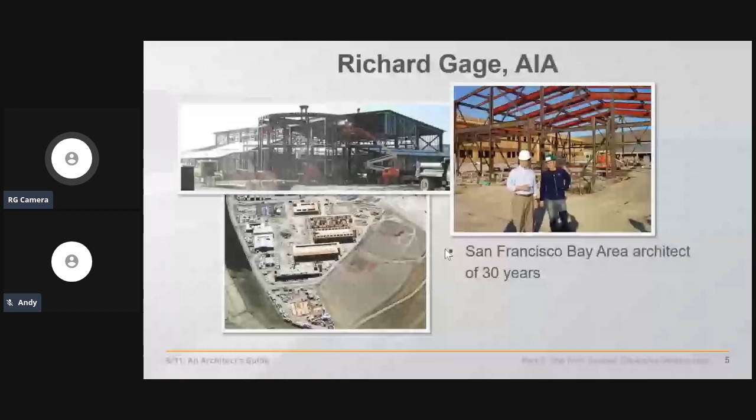Thank you so much, Andy. I want to make sure people understand something about my background. I was responsible at a local firm in the San Francisco Bay Area for the construction documents for these $3 and $10 million gymnasiums and the construction administration for this $125 million high school. More recently, before launching full-time into this important outreach effort, I had similar responsibilities working on this $400 million mixed-use project near Las Vegas with 6 blocks of retail, mid-rise office space, and a parking structure.

Altogether, about 1,200 tons of fireproof steel framing. I now work full-time educating architects, engineers, and others to understand what really happened at the World Trade Center using the material in these courses.

In this case, we do background research, make observations, construct a hypothesis. That's our best guess as to how these towers collapsed. Maybe the jet planes brought them down. Maybe the fires did. Maybe explosions did, and perhaps even controlled demolition.

We'll examine these hypotheses, make predictions on them, test those predictions with experiments, analyze the results, draw conclusions. If the hypothesis is corroborated, we report the results in an open, transparent manner so all can build on the body of our work. We don't hide the input data, for instance, in the computer models used to prove our hypothesis, as NIST has done.

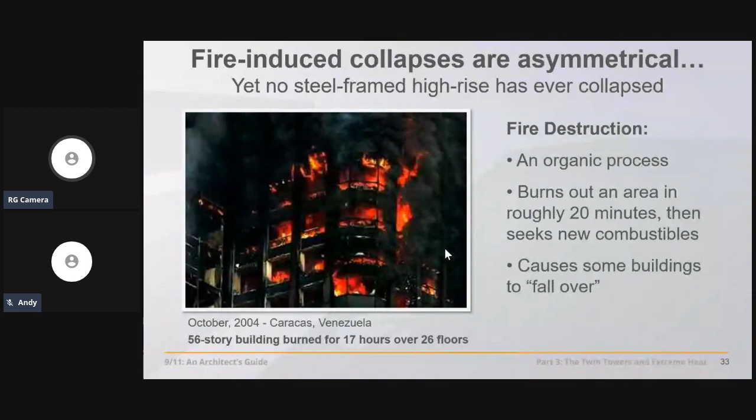There's been some great tests done. In this case, they built an 8-story steel framed building, some of which was fireproofed, some of which was not. This was the largest test of its kind, done in 1995 in the UK, loading it up with all kinds of fuel as you can see inside of this building. They really wanted to test the steel and see what would happen in the most severe case, creating 2,000-degree fires.

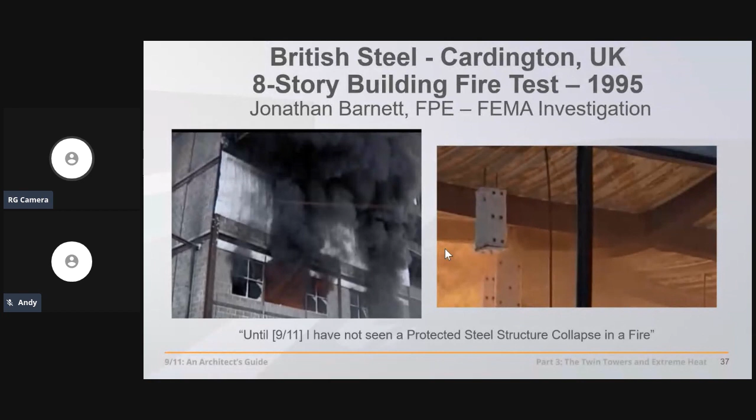And indeed, all that happens is the beams begin to sag. There's no failure of this building, even with beams that are not fireproofed. All of our skyscrapers are fireproofed in the United States.

The test results show it's inherently stable due to the highly redundant nature of the structural steel form. So we have an incredibly important precedent for steel buildings not failing. This test is more applicable to Building 7, which we covered in the first or second week of August, I believe, and which is available online.

You can look that up on YouTube, search for '9/11: An Architect's Guide to Building 7.' That's a precedent that applies particularly to Building 7.

Why? Because Building 7 had these kinds of beams, although they were fireproofed. The Twin Towers are different. We'll look at the structure of the Twin Towers in a moment.

But other buildings have collapsed due to natural causes, in this case earthquakes. The buildings fall over to the path of least resistance. The building is certainly damaged, but it's recognizable as a building. It doesn't collapse into its individual structural column and beam components, for instance.

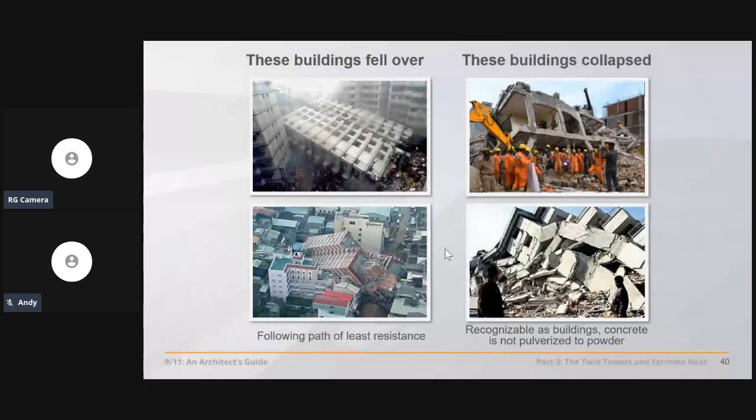This is a very characteristic set of features formed only with great heat. We have chemical reactions that cause those, and witnesses see the results of those. They hear sounds of explosions and they see flashes of light. If you have these features, you know you have explosions.

So keep this in mind. This is an important set of research that we can learn to expect what we would see in a gravitational collapse versus a collapse by explosions or a collapse by fire.

That reminds me, I will give you guys a slide that shows what we might see in terms of a collapse by fire in a wood frame building, which has happened. And that's real important, so I'll add that for you.

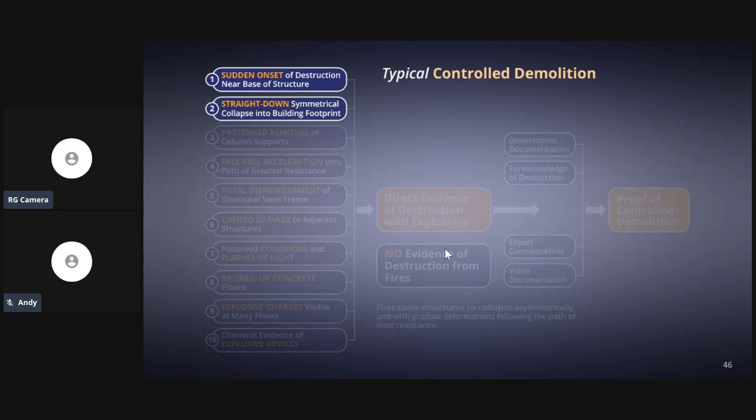There's only a handful of companies in the United States that can handle this type of work. It's extremely difficult, but it's a scientific process and results in a set of features that are commonly recognizable, such as a sudden onset of destruction near the base of the structure, usually but not always; a straight down, nearly symmetrical collapse, depending on how they want to do it, sometimes into the building's footprint.

How do you do that? By removing the columns at once in the desired order, resulting in feature number 4: a free fall acceleration straight down through the path of what was the greatest resistance, the thousands of tons of structural steel in the case of steel buildings that are keeping that building up, that are 3 to 5 times stronger than they need to be to keep that building up.

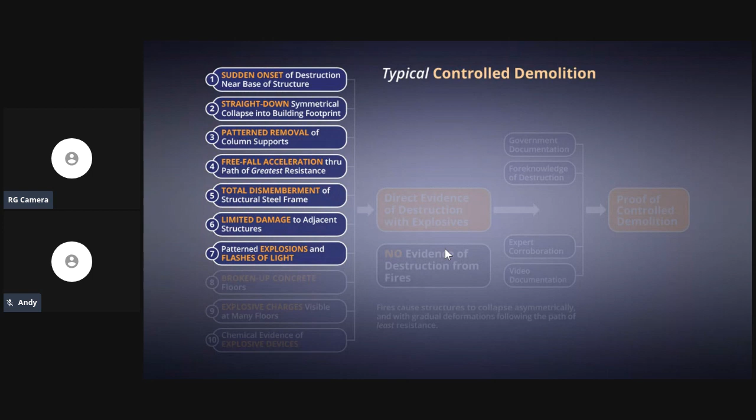That has to disappear somehow, and it results in the total dismemberment of that structural steel frame. Feature number 6: limited damage to adjacent structures, one of the goals certainly of controlled demolitions. Feature 7: patterned explosions and flashes of light heard and seen by witnesses.

Broken up concrete floors—you don't want to leave those floors there and have to jackhammer them up later at all odd and unsafe angles for the workmen to work at. Feature number 9: explosive charges visible at many of the floors. These are isolated explosive ejections called squibs in the demolition industry.

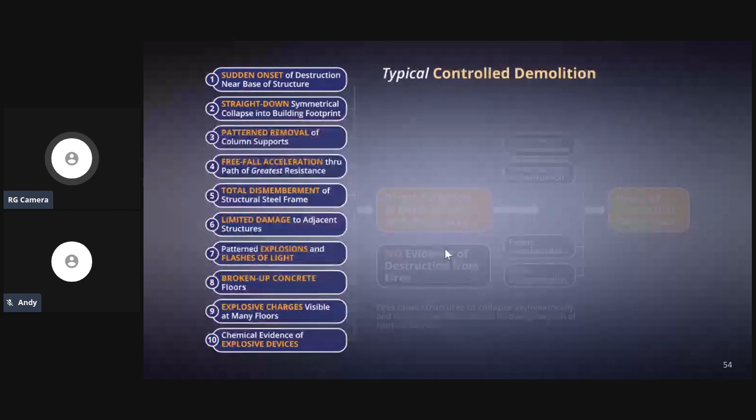Sometimes they're mistimed, sometimes they go off early on purpose, but they're easily recognizable as an explosive. And there's chemical evidence of these explosive devices left behind in the residue. All this is direct evidence of destruction with explosives.

Fire doesn't create these features. Fires cause structures to collapse asymmetrically with gradual deformations following the path of least resistance. So for instance, these fires in the First Interstate building burned 3.5 hours over 5 floors—no collapse.

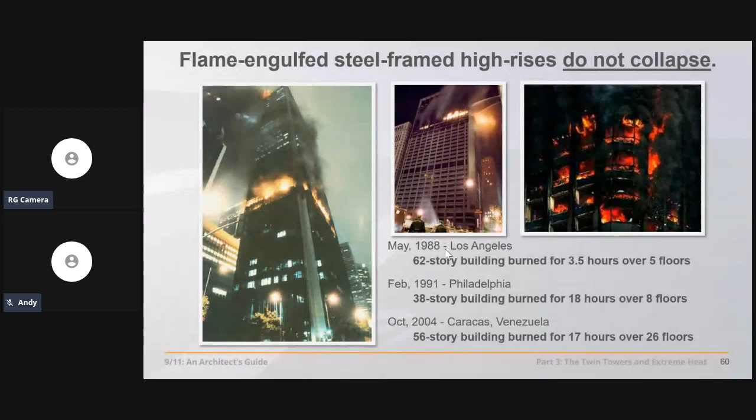Philadelphia: 18 hours over 8 floors, no collapse, because this is a steel framed, fireproofed set of buildings. Venezuela: 17 hours over 26 floors, no collapse. None before 9/11.

Why? Well, the steel conducts that heat away very effectively from its original heat source, and distributes it throughout thousands of tons of heat sink. The steel never gets to its 1200-degree temperature at which steel can soften and begin to sag. It's a critical temperature, 1200 degrees. We have to keep the steel from getting to that temperature in any kind of fire.

So we put fireproofing on it: 2-hour fire protection on the beams, 3 hours on the columns. That keeps the steel from ever getting that hot.

In the case of the Twin Towers, the fireproofing on the steel was said to have been scraped off or knocked off by the impacts of the airplanes, and we're going to be looking at that in a moment. We also build these buildings out of non-combustible materials and keep tenants from bringing in loads of fuel that could make fire a real problem.

To keep fire from ever becoming a problem, we put it out before it even gets to be a problem with sprinklers. In the case of the Twin Towers, the sprinklers were said to have been disabled by the impacts of the airplanes and the explosions that occurred along with those.

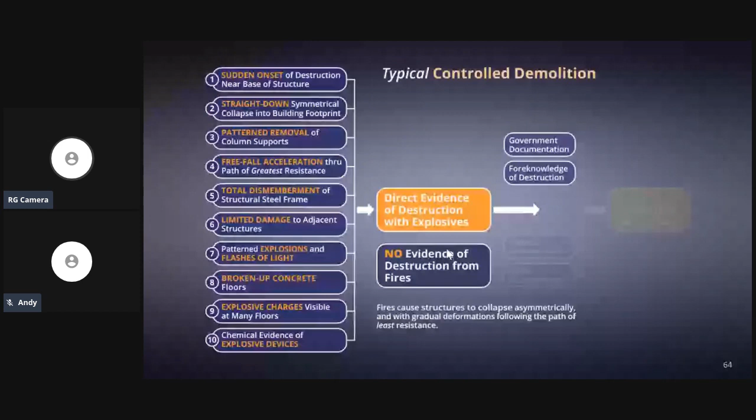We also have additional circumstantial corroborative evidence that we can rely on for additional support for proof of controlled demolition, such as government documentation. You don't just go out and bring a building down - you need approvals, typically. So we have foreknowledge of the destruction. We'll be looking at some of that. We looked at some of that last week in this webinar, in part 2, which is on YouTube - you can look that up, 9/11 An Architect's Guide, part 2.

Experts agree this is a controlled demolition - at least those experts without a financial or political obligation that might sway their objective opinion. So we'll look at the experts today. Video documentation, of course, can be very helpful in determining what happened. We looked at a lot of that last week, and we'll look at more this week. This can all be proof of controlled demolition.

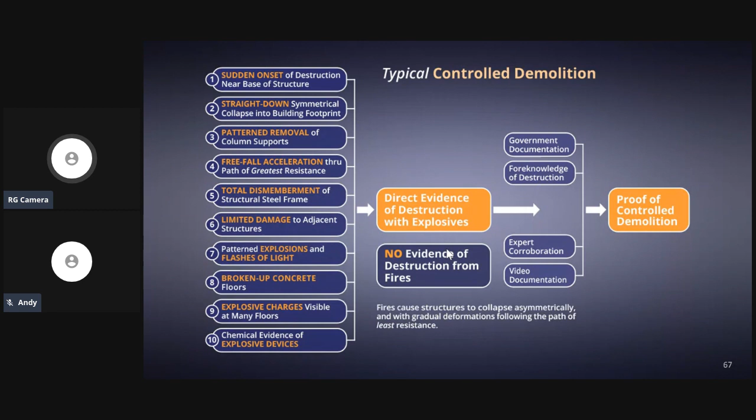With that in mind, let's focus that model on the Twin Towers as we proceed from last week, in which we saw feature number 1, 2, 3, 4, 5, 6, 7, and 8. We saw these features all very clearly defined last week - some very characteristic features of controlled demolition too.

And that was all direct evidence of destruction with explosives, not evidence of fire. Fires cause less robust structures to collapse, again asymmetrically, with gradual deformations along the path of least resistance. Today we'll be focusing on the extreme heat exhibited by the pyroclastic-like clouds that we'll have here.

Let's look at the National Fire Protection Association guide, NFPA 921, Guide for Investigation of Fire and Explosions. It says, look for thermal effects. What does that mean? Large volumes of gas and the large amount of heat released in chemical explosions, causing rapidly expanding plumes of hot gases. Now, we certainly had that when the planes hit the towers, but we're talking about something else here.

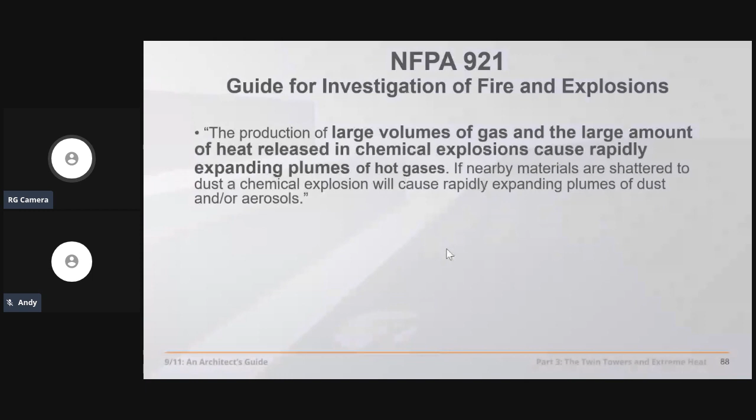This is down in the pile after the buildings have collapsed. This is not about the airplane impacts - this is during the collapse also. We have rapidly expanding cauliflower-shaped plumes in all of the photos and videos, indicating extremely hot gases, which we're going to be looking at the source of today, in a number of different ways, covering lower Manhattan.

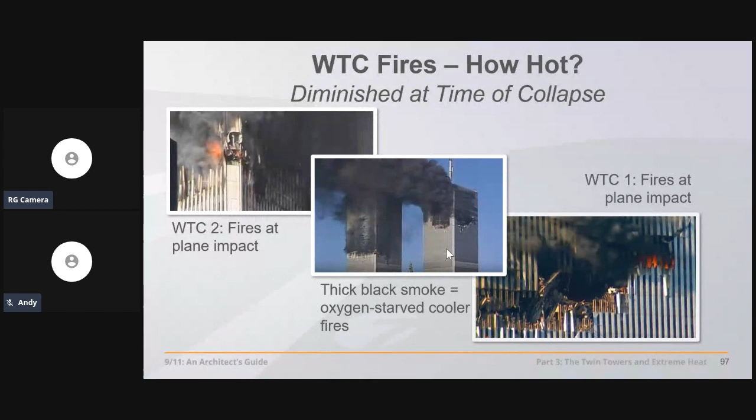I'm making a note here on a correction I have to make. Do we have extremely hot gases at the time of the collapse? No - something else happened after this. At this time, just prior to the collapse, we have diminished fires and temperatures. The thick black smoke indicates oxygen-starved and cooler fires. So where did all that heat come from?

It's got to be coming from something akin to this, and we'll be looking at such evidence as we move into the extreme heat and the evidence of molten steel and iron, particularly well highlighted by Massimo Mazzucco in his 5 DVD set, 9/11 New Pearl Harbor.

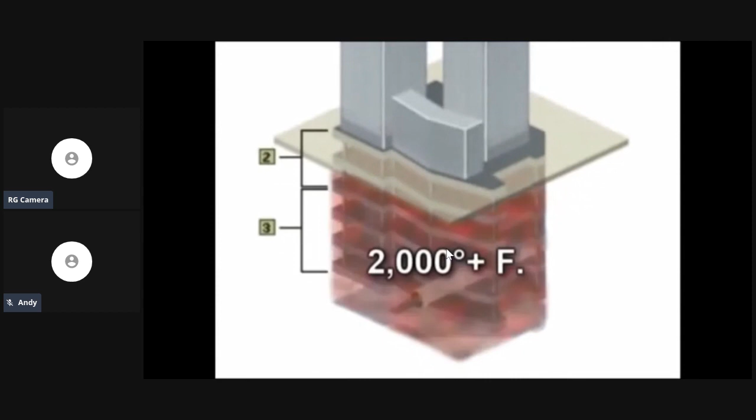Possibly the most important unexplained phenomenon at Ground Zero are the extremely high temperatures registered under the rubble for many weeks after the collapses. On September 16, NASA shot these thermographic images of Ground Zero, indicating unusually high temperatures at the base of the 3 collapsed buildings. Despite the heavy rains of September 14th, the hotspots registered peak temperatures of more than 1,300 degrees under the rubble.

10 days later, the fires kept burning. What's to explain, Governor, the smoke that still comes out? There's still fire down below. There is such an incredibly deep pile of rubble, and the tower goes down 5-6 stories underground. But we had ABC crews come back just in the last few minutes telling us there are still flames coming out of the base of the trade towers. For the rescue workers, this became an additional burden on their already gruesome task. Out still on the rubble, it's still, I believe, 1,100 degrees.

The guy's boots just melt within a few hours.

On October 8th, the hotspots under the 3 collapsed buildings remained clearly visible. 6 weeks later, as the excavations progressed, the situation seemed only to get worse. It's unbelievable, and this is almost 6 weeks later. As we get closer to the center of this, it gets hotter and hotter.

It's probably 1,500 degrees. We've had some small windows into what we thought was a core at some point, and it looked like an oven. It was just roaring inside, and it was just a bright reddish orange color.

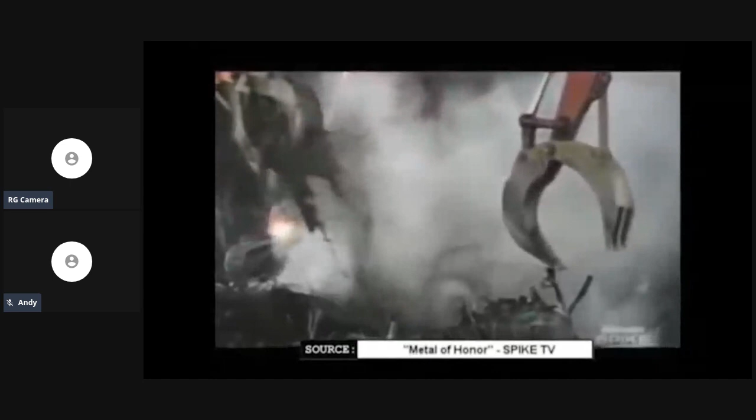The consequences of such extreme temperatures were quite visible on the steel being extracted from the rubble. Where the grapplers were pulling stuff out, big sections of iron were literally on fire on the other end. They would hit the air and burst into flames, which was pretty spooky to see.

We would create an air pocket by moving steel, fueling the fires underground. These underground fires are just like fires of hell. If you could make a video of what you perceive hell to look like, with fire shooting up at times, that's what would happen. You would be in the middle of what would look like steel, and then fire would just pop up. Firemen and ironworkers were coming out with their boots literally melted. Then the hose would come over and they would try to put that part out.

I got there. Charlie Vitchers was a supervisor of removal operations at Ground Zero. From PBS's America Rebuilds page: Vitchers' crew picked up 40 to 60-foot long pieces of steel impaled in the pile, where the bottom 20 feet would be glowing red hot. Vitchers said trucks loaded with steel would pass by, and you could feel the back of your neck burning standing 20 feet away.

In an article called A Dangerous Work Site, the U.S. Department of Labor wrote that underground fires burned at temperatures of 2,000 degrees Fahrenheit. This was confirmed by Mayor Giuliani, who said there were fires of 2,000 degrees Fahrenheit below the ground. The Journal of the American Society of Safety Engineers wrote that thermal measurements taken by helicopter each day showed underground temperatures ranging from 400 to more than 2,800 degrees Fahrenheit.

8 weeks later, and the fires still had not subsided. You see how this debris is still smoking? That's from the fires that are still burning. 8 weeks later, we still got fires burning. So, I mean, these things are burning. At one point, I think they were about 2,800 degrees.

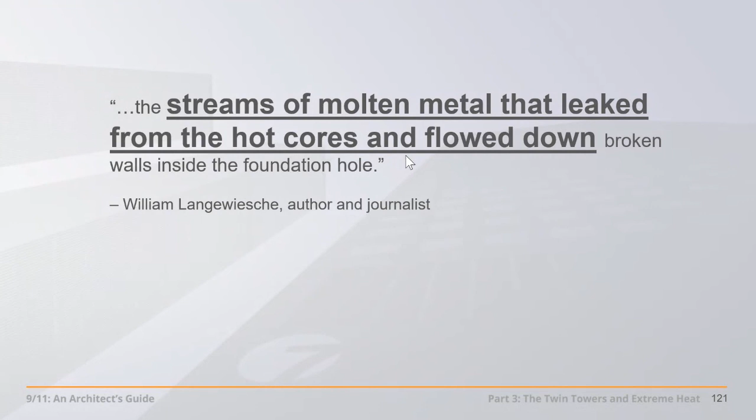Red hot steel being pulled from deep within the pile, dripping from the molten steel, says this firefighter. Saw pools of literally molten steel, says the president of the cleanup company, Tully Construction. Seeing the molten steel, uncovering red hot metal beams, ranging from molten metal which was still red hot weeks after the event. Molten steel at the heart of the tower's remains. Streams of molten metal that leaked from the hot cores and flowed down. Metal dripping from a beam.

Molten steel beams to human remains. The end of the beam dripping molten steel. Mark Loizeaux, president of Controlled Demolition, Inc., confirms molten steel was encountered primarily during excavation of debris. There are both videotape and photos of the molten steel being dipped out by the buckets of the excavators. A river of molten steel, a little river of steel flowing - says who? Leslie Robertson, the actual structural engineer of the company himself. Are these credible witnesses? His associate, Richard Garlock, said the debris past the columns was red hot, molten, running. We see molten material flowing out of the South Tower.

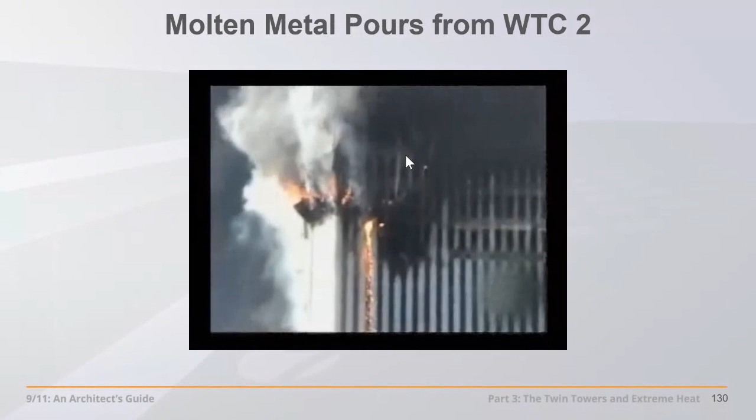In a frequently asked question, answered years later but very frequently asked: this must be molten aluminum from an airplane. Nope. Molten aluminum looks silvery in daylight conditions.

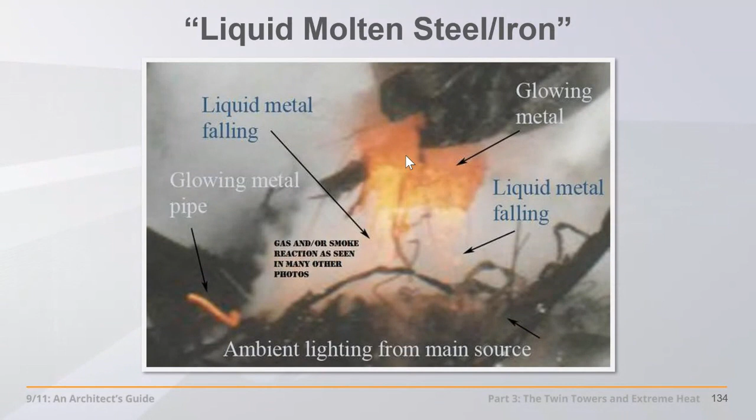Doesn't glow yellow and orange like this. This is iron or steel, can only be liquid metal falling out of the crab claw excavator.

At the New York Police Museum today, you can see molten concrete. Now, concrete doesn't melt until 3,200 degrees, around the guns in the police area in Building 6.

Molten concrete. I didn't even know concrete could melt. Fire temperature so intense that concrete melted like lava around everything in its path, including this handgun. Steel members in the debris pile appeared to have been partly evaporated under extraordinarily high temperatures.

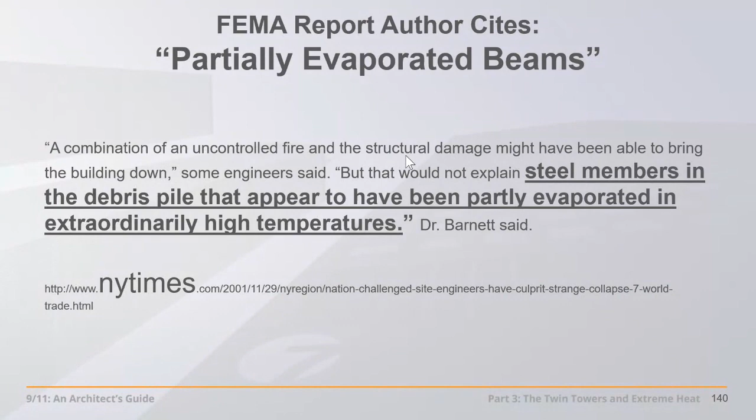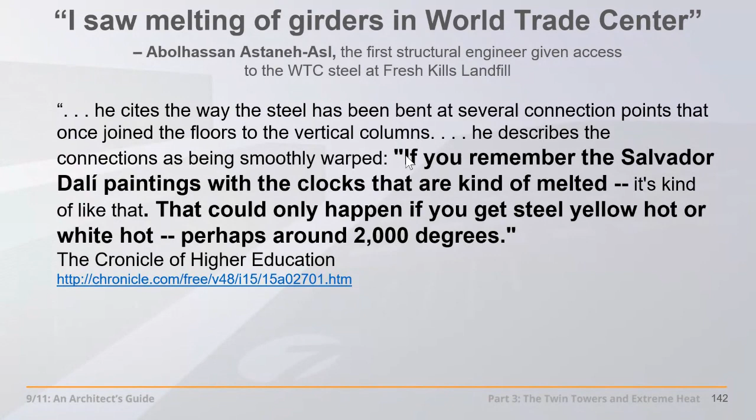I saw melting of girders at the World Trade Center, says one of the lead structural engineers investigating the debris, Abolhassan Astaneh-Asl. He says if you remember the Salvador Dali paintings with clocks that are kind of melted, it's like that. It can only happen if you get steel yellow hot or white hot, perhaps around 2,000 degrees.

But these fires weren't that hot. That's why we're talking about this. Let's go back to Massimo Mazzucco.

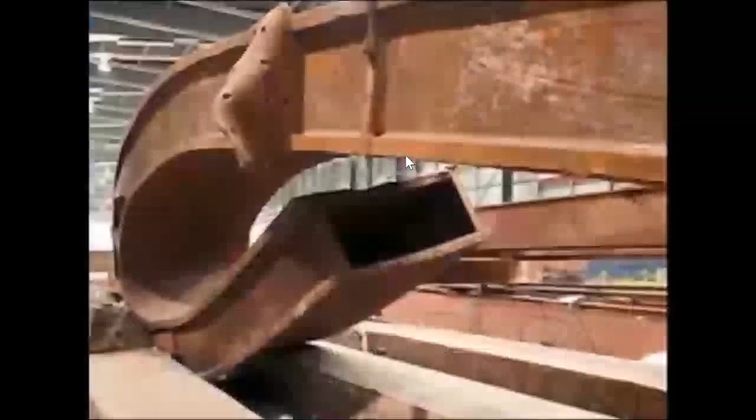Another proof of extremely high temperatures reached during the collapse are the twisted and mangled steel beams found at Ground Zero. Architects, engineers, people who work with steel, welders have just never seen the level of destruction and the level of deformation of this material in our lives.

You saw steel, some of the thickest steel I've ever seen, bent like a pretzel. This 8-ton steel I-beam is 6 inches thick. It was selected to be preserved for future generations for the near-perfect horseshoe-like bend formed during the collapse.

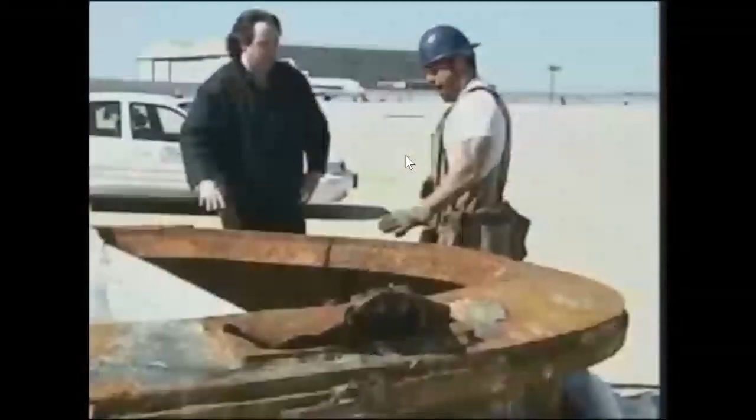I found it hard to believe that it actually bent because of the size of it and how there's no cracks in the iron. It bent without almost a single crack in it. It takes thousands of degrees to bend steel like this.

In fact, the temperature of 2,800 degrees mentioned before is not casual at all, as that's exactly the temperature at which steel melts.

Well, how do we get to temperatures at which steel melts? It's documented by FEMA in their report, which came out in 2002, in their Appendix C, a metallurgical examination of the steel.

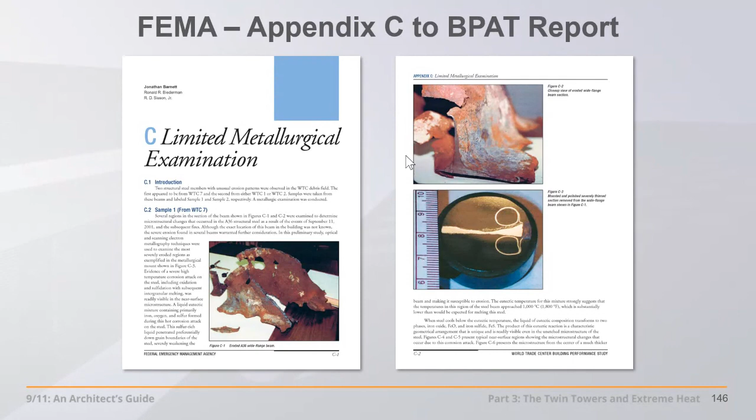Let's look at it. A 1-inch column reduced to half-inch thickness, its edges curled like a paper scroll, thinned to almost razor sharpness. What happened to this steel?

Not fire. Fire can't do this. Rapid oxidation, sulfidation, they describe, intergranular melting, liquid iron. Now that's molten iron. That's 2,800 degrees minimum.

Sulfur formed during this hot corrosion attack on the steel. Where did the sulfur come from? No clear explanation for the source of sulfur has been identified.

Well, this is called the deepest mystery uncovered in the investigation, yet it's completely ignored by NIST, and it's omitted in the final NIST report. The presence of sulfur was very clearly identified in this Appendix C of FEMA.

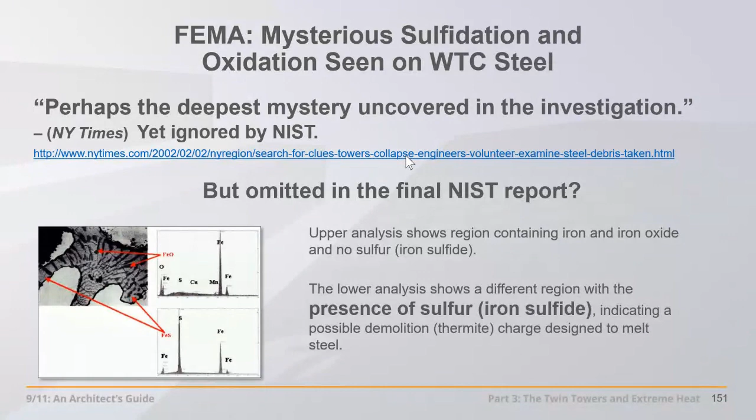NIST took over the investigation, threw out this Appendix C, and years later, acknowledged in their frequently asked questions that sulfur present in the gypsum wallboard was prevalent in interior partitions.

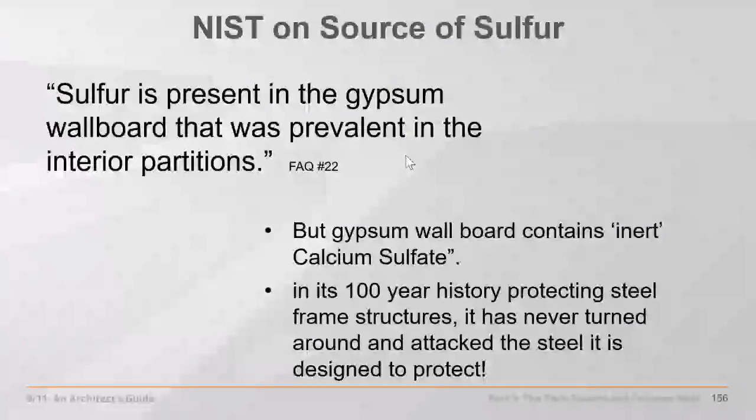Wait, that can't be. Gypsum wallboard contains inert calcium sulfate, and in its 100-year history of protecting steel, it has never turned around and attacked the steel that it's designed to protect. So this is a ludicrous speculation on the part of NIST to try to explain something that the official story cannot possibly explain.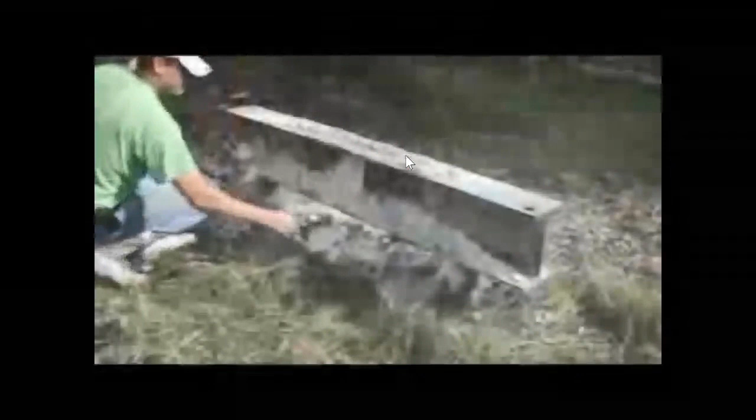Experiments is what you do to see if inert calcium sulfate can turn around and attack the steel. You set a 2,000 degree fire, you put powdered gypsum in there, and you see if it attacks the steel.

But as you can see, no attack on the steel. That's why they use gypsum wallboard to protect it. Where was it coming from? It burned. The smell of sulfur, says this demolition worker.

Well, let's see what NIST has to say about this phenomenon. First of all, let's go back to your basic premise that there was a pool of molten steel. I know of absolutely nobody, and no eyewitness who said so, nobody who's produced it.

But witnesses testify otherwise. Get down below and you'd see molten steel running down the channel rails, like you're in a foundry. Like lava from a volcano.

Actually melted beams where it was molten steel that was being dug out. Underground, it was still so hot that molten metal dripped down the sides of a wall. And the cleanup was very difficult in the beginning.

Steel was coming out red in certain areas from the first couple of weeks. This fused element of steel, molten steel. And they pulled off a big block of concrete, and there was like a little river of steel flowing.

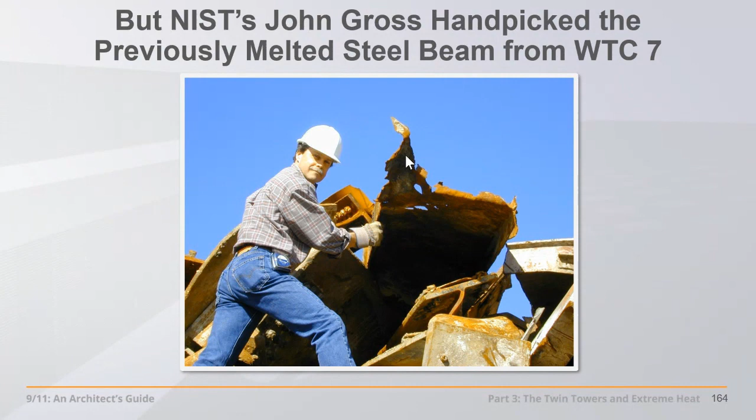Leslie Robertson confirmed a river of steel flowing once again. Here's John Gross, lead project engineer—you just heard from him. He's cutting off the very piece of steel that was sent to FEMA in the beginning to study for their Appendix C. They included this piece in Appendix C, and yet NIST says, gosh, we have no steel could be recovered. What molten iron are you talking about?

It's not jet fuel, because the fires are speculated by some supporters of the official story to be 1,200 degrees. NIST claims 1,800 degrees Fahrenheit. Even so, we're 3 times less than what's needed to melt steel. It's not the jet fuel. Jet fuel, according to its manufacturer, burns only 600 degrees in the open air.

Yet steel had definitely melted. As you can see here, we can tell by the material, molten metals, what the temperature is by the color. We're exceeding 2,500 degrees here in the yellow and white portion down at the bottom. So where is this coming from?

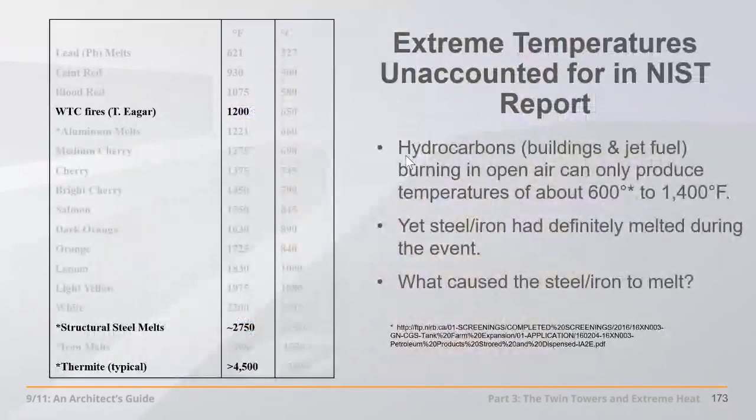This incredible hot temperature—NIST says any molten steel in the wreckage was more likely due to the high temperature resulting from long exposure to combustion within the pile. What? Exposure to combustion? How do you get temperatures exceeding the capability?

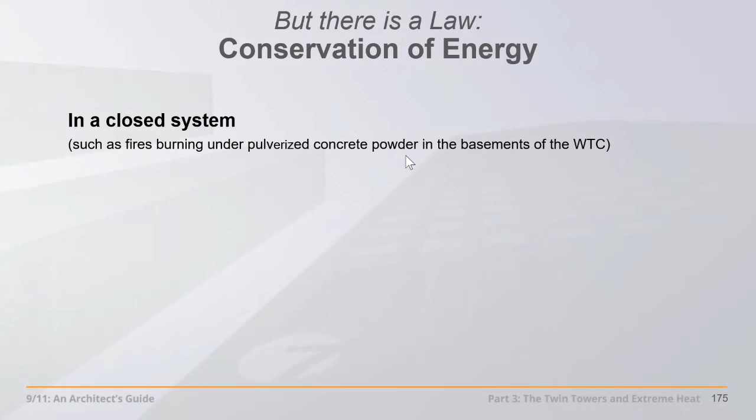This is a closed system. There's a law, it's called the conservation of energy. Like fires burning under pulverized concrete powder in the basements of the World Trade Center, the amount of energy is fixed. You can't create any more energy inside the system. In other words, a fire can't get hotter than the capacity of the fuel that it's burning. You can only convert that energy from one form to another—the heat is dissipated, it doesn't increase. So we look at evidence for the potential cause of all of this heat.

Forensic evidence: thermite is a possibility. Could it have produced all that molten metal in those extreme temperatures? Well, what is thermite anyway? An incendiary used by the military, thermite is a compound of iron oxide and aluminum, which when ignited sustains an extreme heat reaction, creating molten iron. In just 2 seconds, thermite can reach temperatures over 4,500 degrees Fahrenheit, quite enough to liquefy steel.

We know that open-air fires cannot burn hot enough to melt steel, but metal had melted at the base of the towers. Appendix C of the FEMA report describes sulfur residues on the World Trade Center steel. The New York Times called this the deepest mystery of all. Sulfur slightly lowers the melting point of iron, and iron oxide and iron sulfide had formed on the surface of the structural steel. Sulfur used with thermite is called thermate, producing even faster results.

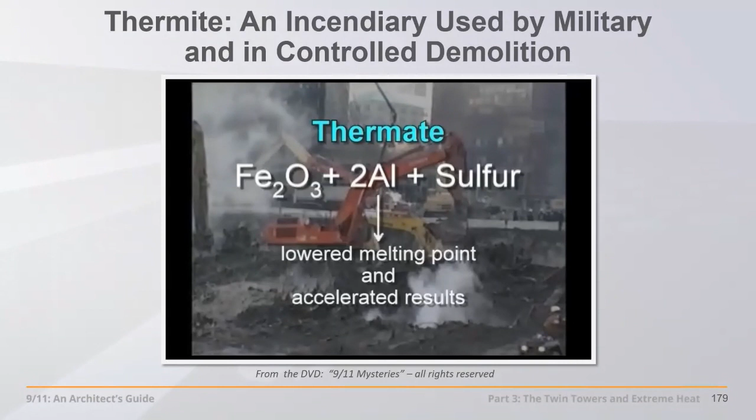Maybe we're getting somewhere here, because if thermite were used, it would explain the molten iron—not molten steel, but iron. By the way, we haven't used elemental iron in about 100 years in our skyscrapers, so this is elemental iron we're talking about. It's not coming from the steel. It would explain the presence of extreme heat, because 4,500 degree temperatures are the byproduct of a thermite reaction. It would also explain the sulfur, because sulfur is added to thermite to become thermate, much more effective at cutting through steel. None of these features can be explained in the official story.

Let's go back to NFPA 921. It says, look for unusual residues that could arise from thermite, magnesium, or other pyrotechnic materials. The National Fire Protection Association is the authority on fire and explosion investigation, used not only in the United States but throughout large parts of the world.

NIST says, well, we found no corroborating evidence to suggest that explosives were used. But when pressed a year later, they finally admit: we didn't test for the presence of explosive residue. You can't find what you won't look for, but others looked for it and found it. It wasn't that hard to find.

Here's Steven Jones, physicist formerly from Brigham Young University. He says thermite reactions would produce a characteristic burn pattern—a white, yellow, hot liquid metal, like we see pouring out of the South Tower minutes prior to its collapse and throughout the piles, as you've seen already.

A whitish cloud of aluminum oxide ash—what? As you see rising from the top of this material pouring out of the Twin Towers minutes prior to its collapse. And as you see trailing these thick white smoke clouds, trailing these freely flying structural steel sections that we looked at last week, flying out horizontally and at 45 degrees. Steel isn't flammable; it's not on fire unless there's something burning in and on the steel, such as a thermitic reaction.

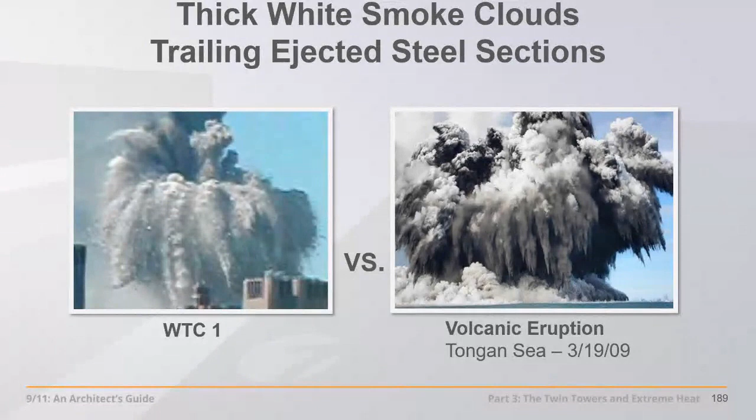What else about thermite? It would leave behind unique chemical evidence, such as iron, aluminum, copper, calcium, silicon - fairly common elements - but also some unusual elements like fluorine and manganese left behind.

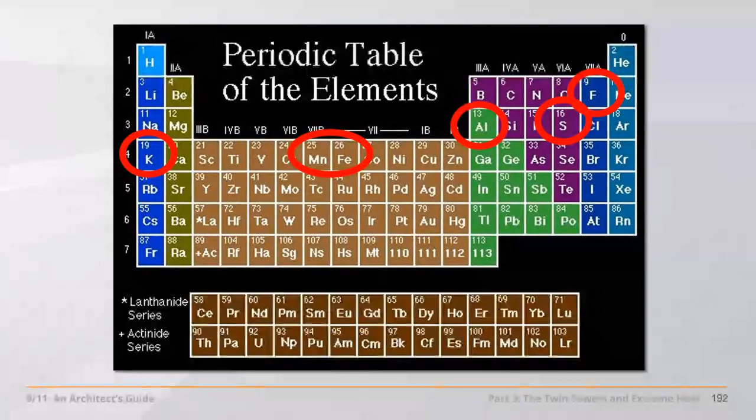These elements on the periodic table were found in this small section of this 40-pound chunk called meteorites, fused molten metal. Some chips were sent to Steven Jones, and he rules out aluminum from the jet planes because it's predominantly iron, previously molten iron.

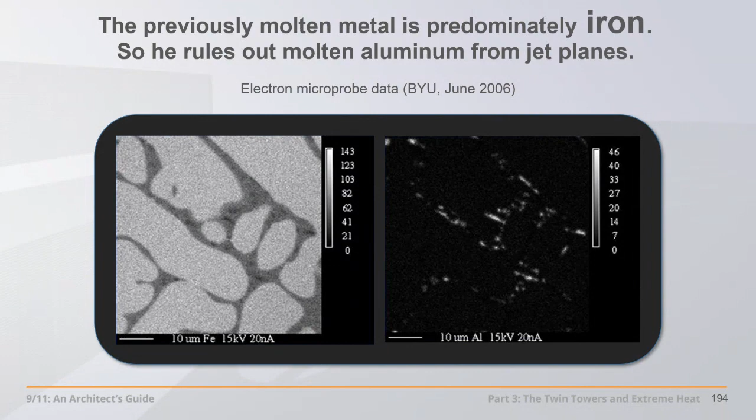He says it has abundant manganese in this electron microprobe data analysis, so he rules out molten structural steel as a major component. It has aluminum, sulfur, potassium. So this is clearly the residue of thermite.

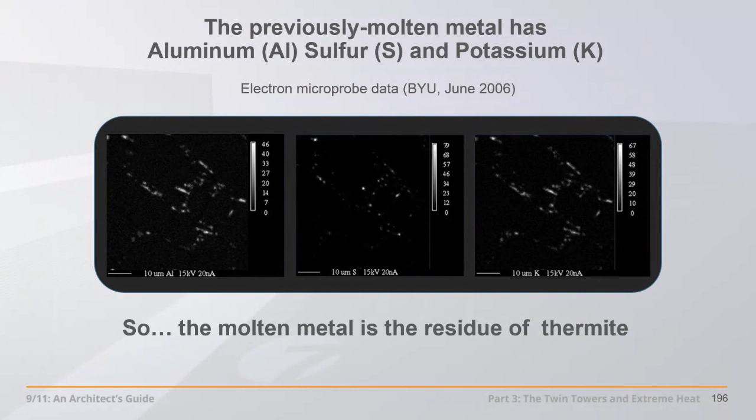What's that doing in the World Trade Center aftermath? Oh, it has manganese and fluorine in abundance. This is from potassium permanganate, commonly used as an oxidizer in thermite. Fluorine is used in sol-gel type thermite charges, very special ones. So this is all part of a thermite fingerprint.

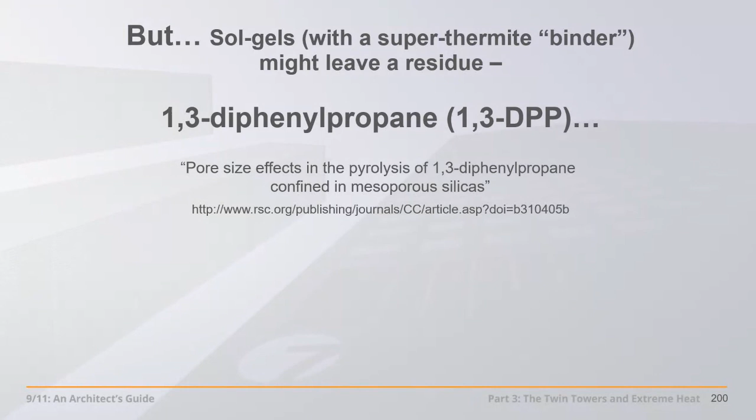Sol-gels would leave behind a very special residue, though: 1,3-diphenylpropane. Interestingly enough, one molecule was present at levels that dwarfed all others, says Erik Swartz - 1,3-diphenylpropane. We've never observed it in any other sampling we've ever done.

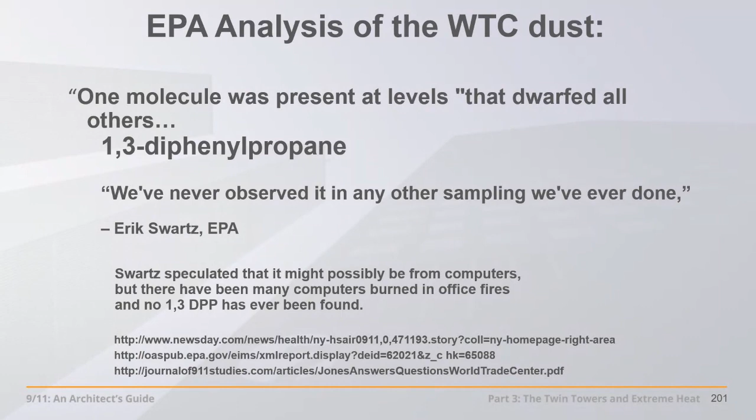It's not from plastics, it's not from computers. Even though they speculate - gosh, what else could it be from? It must be from something like that. But they never found 1,3-diphenylpropane in office fires that have plenty of plastics and computers.

He examines a piece of this steel sent to him by the sculptor at the International Peace Park in Manitoba - World Trade Center 7 steel in this case. X-ray energy dispersive spectroscopy determines what? Iron, sulfur, potassium, manganese. This is another fingerprint of thermite, says Steven Jones, physicist.

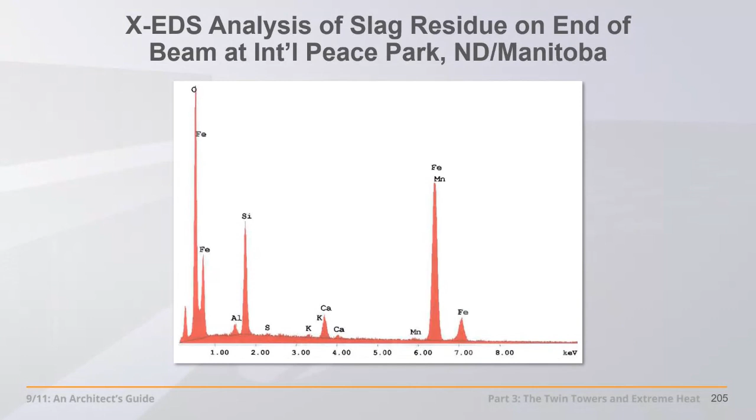Well, you can make thermite in your backyard, and thermate as well. Jonathan Cole, civil engineer, did. You have to use a shaped cutter charge. You can't just pour this against the steel like the ridiculous National Geographic experiment on their program, in which they tried to debunk conspiracy theorists. No, you have to put a shaped cutter charge.

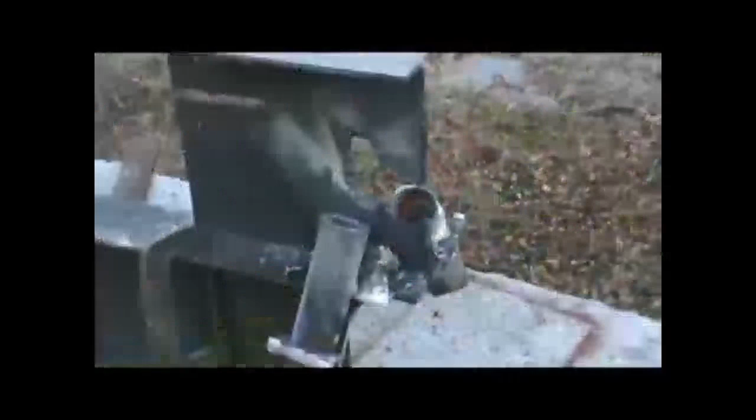You can make it at home - here it goes. The web was reduced in thickness with gaping holes, thinned to almost razor sharpness, with a Swiss cheese appearance. Where did I see that before? Oh, in the FEMA analysis of the steel from the Twin Towers in Appendix C, which NIST threw out when they took over the investigation.

There are very highly efficient thermite-based cutter charges developed prior to 9/11, 2001, in which molten iron streams are issued in hundreds of milliseconds, cutting through much more thickness of steel - much greater thickness than is capable with shaped cutter charges of high energy explosives like C4 and RDX.

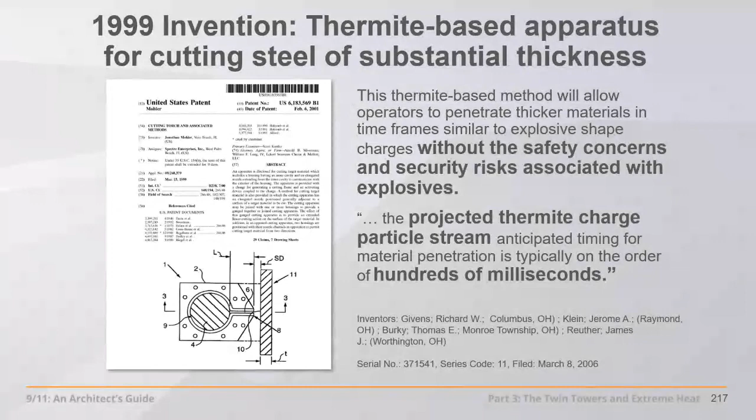Which is why they might not have used them. They also might not have used traditional shaped cutter charges because those provide very loud bangs and very bright flashes. That audio and visual signature might have been a dead giveaway. So something a little more subtle seems to have been the order of the day here.

This device uses consolidated consumable thermite as its casing, so there'd be nothing left in the pile except pools of molten iron, which we have plenty of.

But what else did they find in the fine powder? So ubiquitous across 9/11, from river to river, a 3-inch thick pile which is 30% concrete, as we looked at in last week's webinar. The U.S. Geological Survey does a particle atlas of dozens and dozens of different samples, and they always find the same thing though: previously molten iron microspheres, almost invisible to the naked eye, most of them.

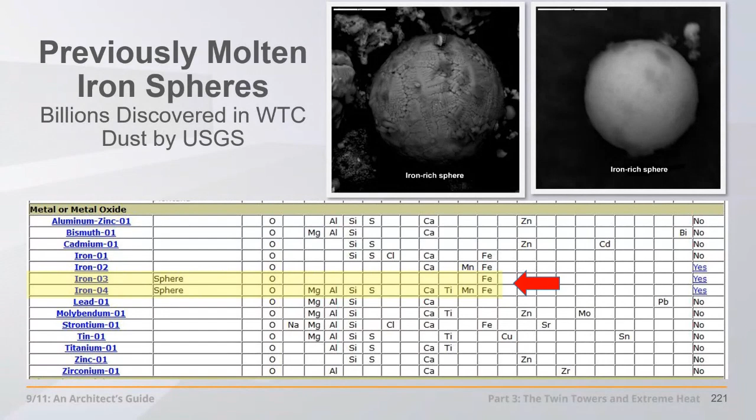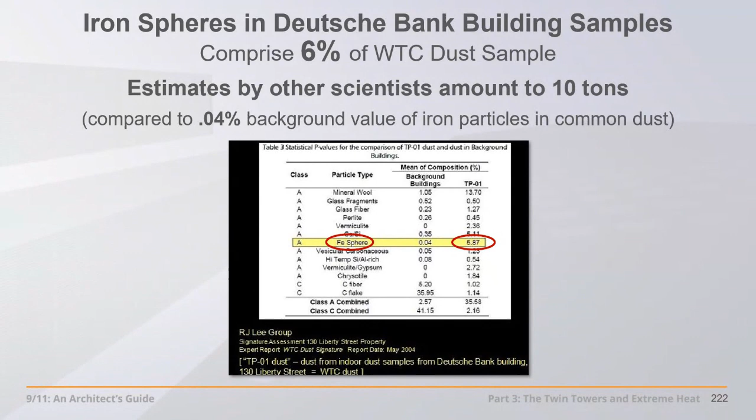They're real small. Where do these come from? Almost 6% of some of these samples is composed of these previously molten iron microspheres. Scientists estimate up to 10 tons of this material by extrapolation. It's way more, 150 times more than the background iron particles that are in common office dust on the left. And they're spherical, not strangely shaped objects. These are very different. Something created these.

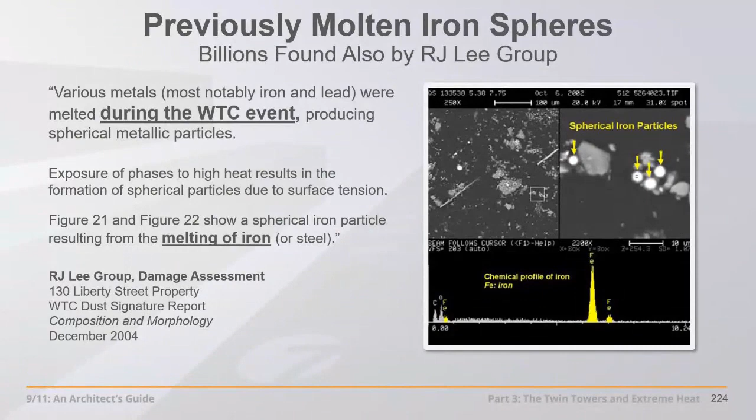R.J. Lee, an environmental consulting firm also studying the dust independently, says they're formed during the event. So we have molten iron microspheres formed during the event. This is very interesting. The EPA says there's so many of them, and they're so ubiquitous that it's used to distinguish World Trade Center dust from common office building dust. So it's not even World Trade Center dust unless it has these iron microspheres, which we don't know where they came from. Well, here's where they could have come from.

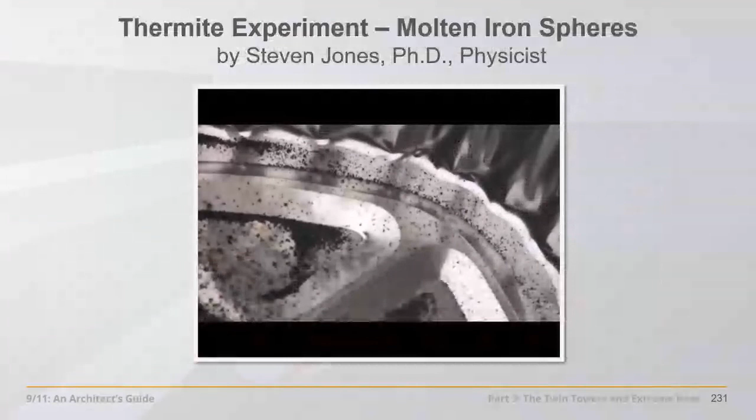This is a thermite experiment. Under controlled conditions, even right here, we have thousands and thousands of sparks. No, not sparks. Molten iron microspheres released and formed, released under pressure, aerosolized if you will, and because of surface tension of liquids, it forms itself into a sphere.

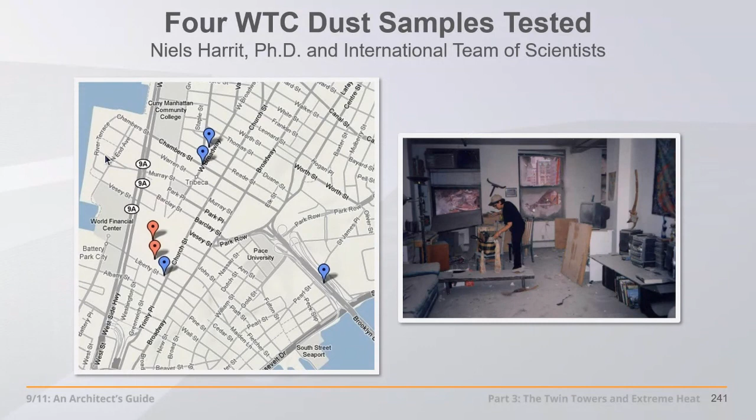What else was found in the World Trade Center dust? A team of 8 scientists led by Niels Harrit and others documented 7 samples in a peer review, took 4 of them, like from the apartment of Janette MacKinlay across the street from the South Tower on Liberty Street. Her entire apartment was blown in, all of this dust that came through the broken windows. She collected it. She's an artist. It was part of her healing to do sculpture work with this dust. Unfortunately, it killed her. She died of brain cancer, ultimately. But one of these samples is hers.

But they all contain these curious red-gray chips, red on one side, gray on the other, about 1/16 of an inch long on average. And they thought they were paint. But this group got real curious because the chips are attracted to a magnet. Well, they zoom in to the red layer, getting real curious, and do X-ray energy dispersive spectroscopy. They find the same ingredients that's in thermite: iron and aluminum chiefly, but also oxygen, silicon, carbon.

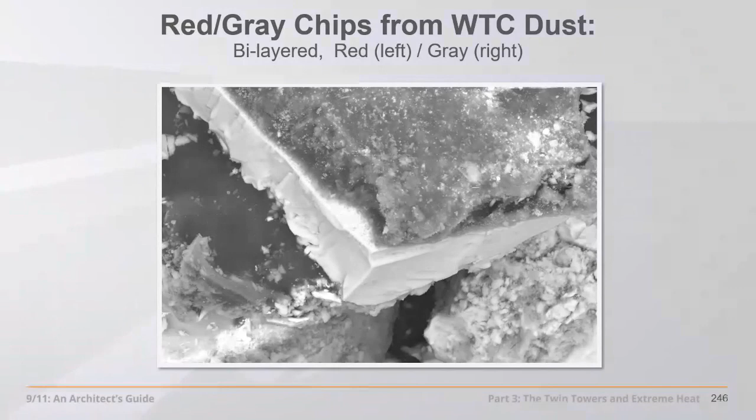Why is there ingredients of thermite in the paint in the World Trade Center? We think it's paint because it's applied in a fluid fashion with a dual layer here. So they get real curious and zoom into the red layer 50,000 times with an electron microscope and find what? Nano-sized particles of iron oxide crystals and aluminum platelets. These are 1,000 times smaller than the diameter of a human hair. Very, very sophisticated material set in an organic bed of oxygen, silica, carbon.

Organic material provides the gas expansion in TNT. It's used to knock things over. So here you have incendiary materials, iron oxide and aluminum, combined with an expansion. So you have an incendiary designed to be more explosive, as we'll see.

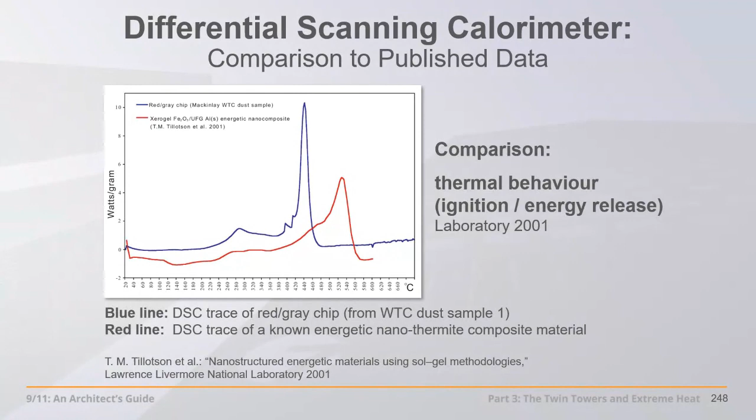So why are we having the same spheres with the same, or very, very similar, same enough chemical signature produced from these tests of these chips that are found by the U.S. Geological Survey in their studies, spheres extracted from the dust. So it's pretty extraordinary similarity, meaning that we know where those spheres came from. They came from these chips.

So we have an internally consistent, self-corroborating set of repeatable forensic evidence, data that can be used to prove in a court of law what brought these towers down, along with this other evidence we're talking about. If we can get it into a court of law, we can put the perpetrators, the real perpetrators of the destruction of these three towers away for a long, long time.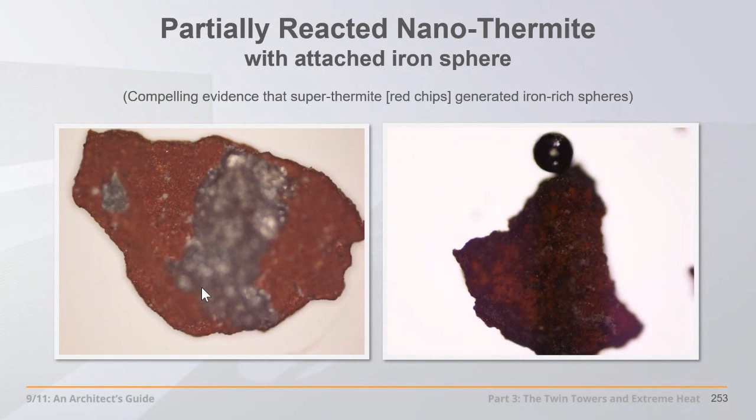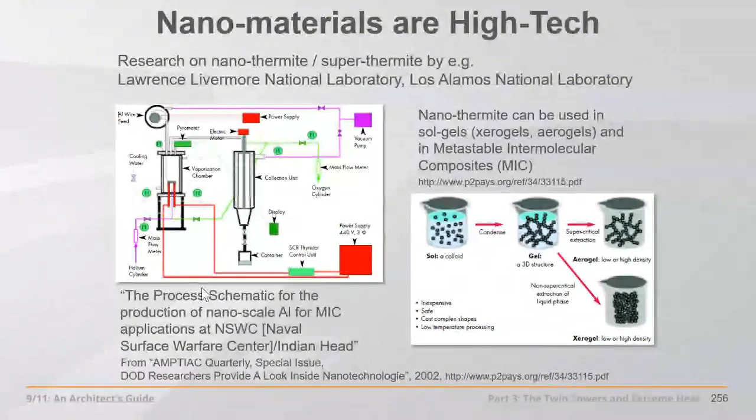This is developed by Lawrence Livermore Lab. You see, with nanotechnology, when you bring the size of these elements down to infinitesimally small, the surface area increases exponentially. So you've engineered an incendiary to become much more explosive. It's not made in a cave in Afghanistan. This is an extremely sophisticated process made only in the most advanced defense contracting laboratories.

So we need a real investigation. This is all peer-reviewed in a paper, by the way, by the Bentham Open Chemical Physics Journal, concluding that the red layer is unreacted thermitic material incorporating nanotechnology, a highly energetic pyrotechnic or explosive. I encourage you to read that. Just Google active thermitic materials.

And this is all direct evidence of explosive destruction. Yet again this week, as we look at extreme heat, we have more direct evidence of explosives and incendiaries, particularly incendiaries this week. No evidence of destruction from fires, especially these fires, not going to be producing all this heat, right? Thick black smoke, oxygen-starved, cooler fires.

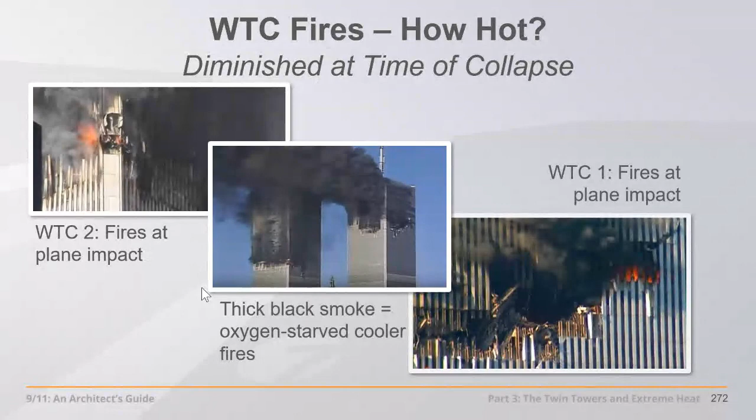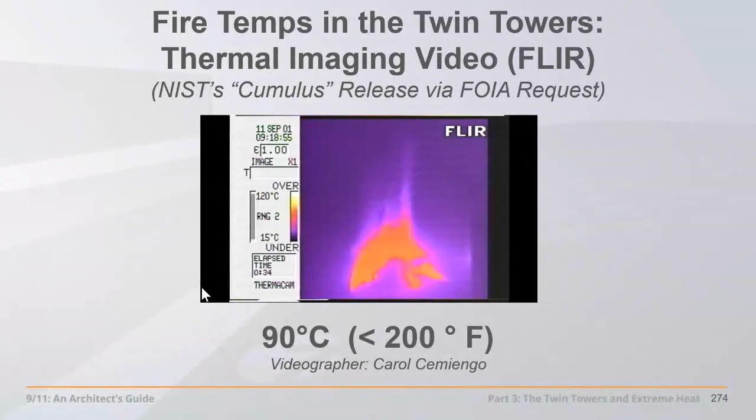In fact, we have the release from the FOIA request of the thermal imaging videos that show what? Relatively cool fires. In this case, only about 200 degrees Fahrenheit on average. Maybe they got up to 500 or 600 degrees. No hotter than that.

What about the testimony of the first responders? We looked at that last week. Data from the FEMA and NIST reports. Let's go to that. In 2002, FEMA produced a report with $600,000, but their efforts were hampered, as documented by the New York Times. They couldn't get access to blueprints of the buildings. Bureaucratic restrictions kept them from interviewing witnesses, making forensic inspections at the site, getting crucial information, and they had to appeal to the public for photographs and videos.

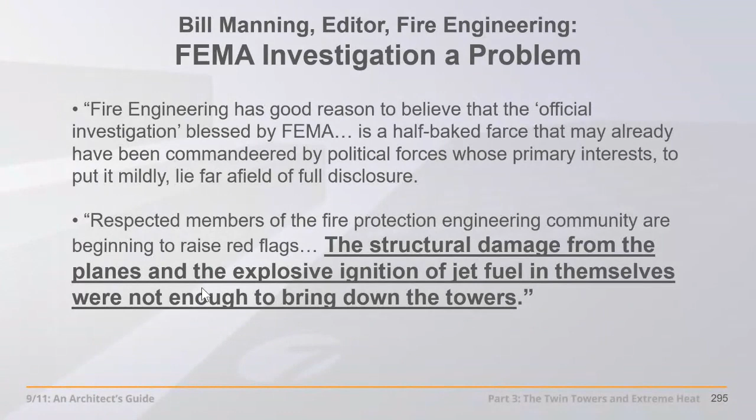That wasn't an investigation, which is what prompted Bill Manning, editor-in-chief of Fire Engineering magazine, to cry out that they have good reason to believe the official investigation blessed by FEMA is a half-baked farce that may have already been commandeered by political forces whose primary interest, to put it mildly, lies far afield of full disclosure. The structural damage from the planes and the explosive ignition of jet fuel in themselves were not enough to bring down the towers. That alone is reason enough for a new investigation, that assessment from our fire protection engineers.

In 2005, NIST comes out with their report, starting with the assessment that these buildings came down by fires. They weren't looking for an independent conclusion, just trying to justify the fire and airplane impact collapse theories. They had $20 million of funding. Now they're part of the executive branch of the US government. Their leadership was changed by the Bush administration when they came into power.

Let's look at the report. Their objective, given to them by Congress, was to determine why and how World Trade Center 1 and 2 collapsed. But there's a problem. They have their own agenda, hidden in footnote 13 on page 82. Check it out: the focus of the investigation was on the sequence of events from the instant of aircraft impact to the initiation of collapse.

What? It doesn't actually include the structural behavior of the tower after the conditions for collapse initiation were reached. Wait a minute, you were tasked by Congress to explain the collapse, not the initiation of collapse. You had 10,000 pages—1,000 pages modeling the airplanes, 100 pages of fire modeling and life safety issues—only half a page on the actual collapse.

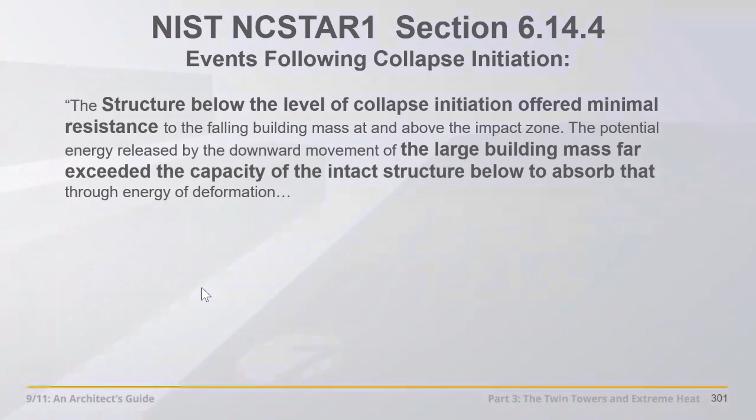Well, what does it say? The structure below the level of collapse initiation offered minimal resistance. The large building mass far exceeded the capacity of the intact structure below to absorb it. It came down essentially in free fall. Floors below were unable to arrest the moving mass.

Wait a minute, that is pure speculation. There's no analysis with supporting calculations whatsoever. The task that Congress gave you, you failed at. It should have been called 'the final report on the initiation of collapse.'

This is a travesty. Then they cast doubt on their own collapse theory, because we wrote to them—which you can do with governmental reports, according to the Data Quality Act, you can provide a request for correction. They write back: 'We were unable to provide a full explanation of the total collapse.' You were unable to provide any explanation or any analysis, really, at all. You didn't. You failed. F.

What do the experts say? At least those experts that aren't tied to financial or political obligations which might sway their objective opinion. Like in this case, we have an independent opinion from Ron Brookman, structural engineer: it doesn't look anything like a heat-induced gravitational collapse mechanism. Why did the complete collapse of the towers somehow become inevitable? Why would all 110 stories drop straight down to the ground in 10 seconds, pulverizing the contents to dust and twisted steel?

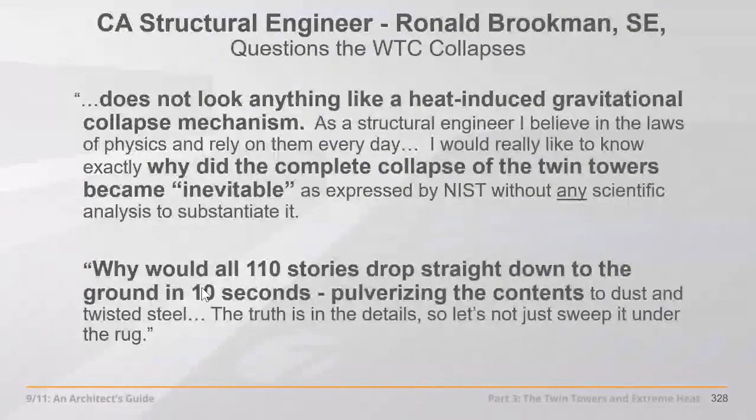Ed Muniak, fire protection engineer: The fires were weak. NIST reports confirm the steel temperatures were low. World Trade Center collapses have no resemblance to any previous high-rise fire.

And there's many more, but we're running out of time. What about the evidence? Surely in the most historic and extraordinary collapse of all time, we've got the evidence preserved so investigators could look at the steel and examine it.

Well, let's listen to one of these investigators: After 9/11, we realized that the Port Authority of New York and New Jersey had sent all the steel that we need to study, that's why I'm here to study steel, to a recycling plant to go to China. For what? For 15 cents a pound. Just nothing. And all the evidence of the steel went to the melting pot.

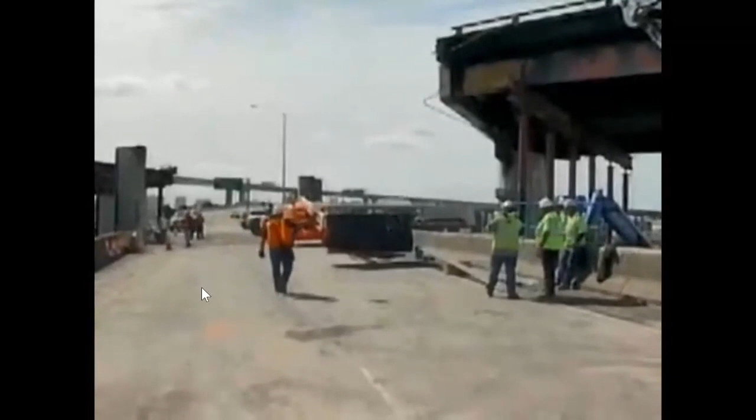After 9/11, a law was passed requiring that such materials be saved for study. Too little, too late. All the evidence of the steel went to the melting pot, he says, to China for recycling. He was one of the main forensic investigators with a grant from the National Science Foundation.

What does Bill Manning say, editor-in-chief of Fire Engineering Magazine? Crucial evidence that can answer many questions is on the slow boat to China, showing an astounding ignorance of government officials to the value of a thorough scientific investigation. The destruction and removal of evidence must stop immediately.

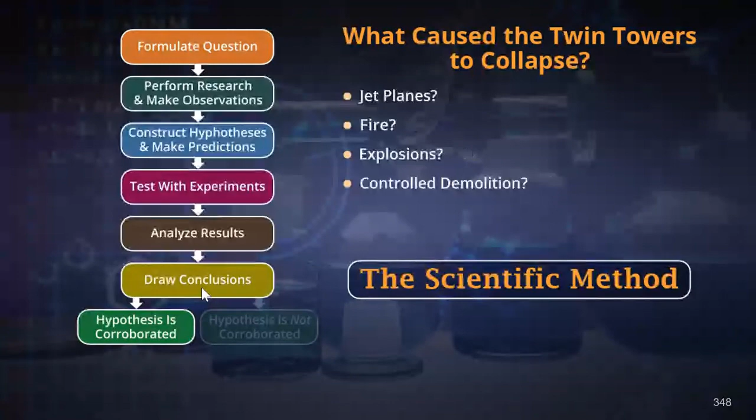But it didn't stop. It was put on barges, sent to China, 400 truckloads a day — easily the largest and most perplexing structural failures in history, and yet it was just destroyed. This is the illegal destruction of evidence in a crime scene, prompting so many to come to the conclusion through the scientific method that controlled demolition is the actual cause of the collapse of these towers.

Today we showed features 8, 9, and 10 of controlled demolition — some very unusual features too. Last week we showed features 1 through 7. Altogether, this is direct evidence of destruction with explosives. Fire doesn't explain these features. With additional circumstantial corroborating evidence, this is proof of controlled demolition.

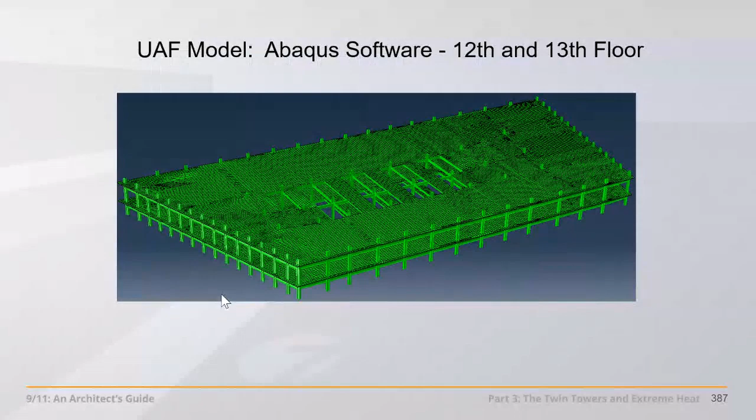Because what has he done? He's proven already beyond a shadow of a doubt that this building did not come down due to fire. That's the conclusion; it's not a surprise. But there's a surprise at the end, because in our 1-minute video, which we're producing for you, which we want you to send viral on social media, he will take Building 7's computer model that they've created after having removed all eight floors of columns. It falls exactly like the video you've seen all over the place in the 9/11 Truth Movement, on our website. You can see it.

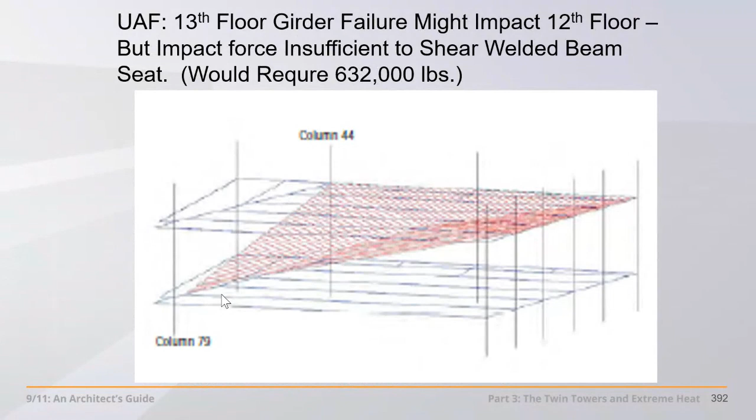As opposed to NIST's video, which can't even mimic the building collapse—because even in their effort to manipulate their data, releasing 400 structural steel sections per second in their computer model, they can't even provide a model that falls. It actually begins to tip over. It doesn't fall straight down like the video, and it looks nothing like the actual collapse.

That's why so many of us are going to Congress with the fire commissioners on September 11th in the afternoon, and we want you to join us if you're in town. We are going to be in Washington, D.C., meeting with members of Congress. We've already got a lot of meetings set up, and we want more. We want to stay really busy on that day and in the days that followed.

In fact, I just confirmed another meeting, Richard, while the webinar was going on. This is exciting, and it's all going to be centered around this.

The Bobby McIlvaine World Trade Center Investigation Act. This is the path to justice for the nearly 3,000 victims who died on that day. One of them was Bobby McIlvaine. He was killed by an explosion as he was entering the North Tower. We know there are no explosions killing people as they enter the lobby in the official story. So right by the nature of how he died, we have questions about the story we've been given.

His father, Bob, has been outspoken on this issue for a number of years. He's stood with us, and he's going to be going with us down to D.C. for these meetings. What this would do is establish a select committee. It can be passed in either house of Congress, and it'll do exactly what we've been asking members of Congress to do since the beginning of AE911Truth—reinvestigate the destruction of these 3 buildings. It's actually written in such a way that they have to look into the case that Richard is presenting here. That's the beauty of it.

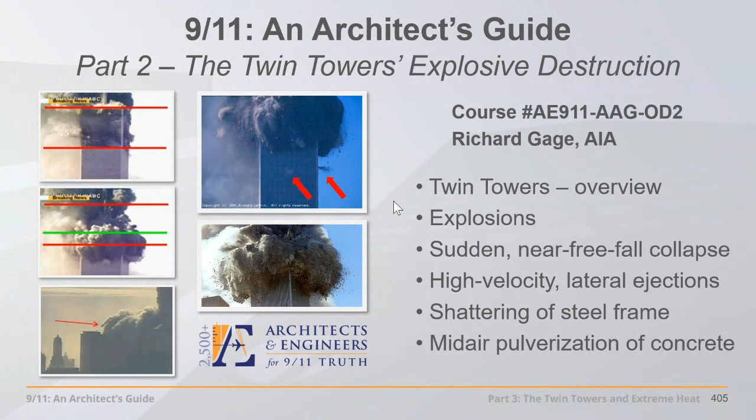Yeah, and what we talked about this week is part 3, Twin Towers and Extreme Heat. And we looked at the high-rise fires, the pyroclastic clouds, molten steel and iron microspheres, thermite, nanothermite. All that is direct evidence of explosive destruction, incendiary destruction, actually, in part 3 here. Last week we looked at part 2, and next month we start all over again with part 1.